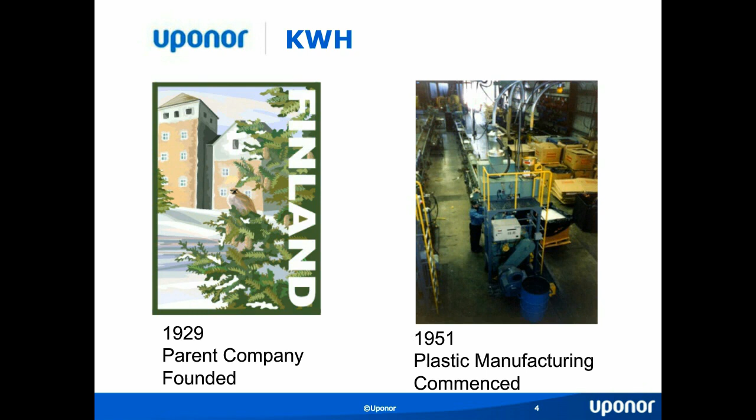After establishing itself as a major pipe manufacturer in Finland and other Scandinavian countries, KWH/Uponor purchased a facility in Huntsville, Ontario in 1968, thus beginning its venture into the North American market. Also in 1968 was the first year that KWH/Uponor began to produce Sclairpipe.

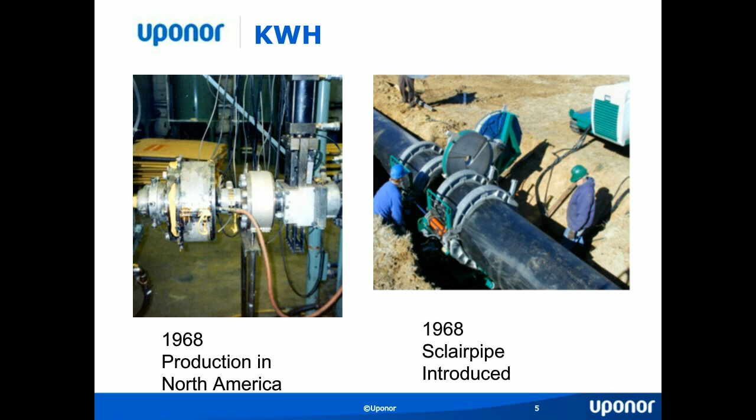Following the opening of our facility in Huntsville, Ontario, it was determined that a second plant was required to meet the demand for polyethylene pipe. That second plant was located in Saskatoon, Saskatchewan. Both plants are ISO certified, and they have fitting shops that can meet any type of application a customer brings to us.

In July of 2013, the merger between Uponor and KWH was approved, and in October 2013, KWH became exclusively known as Uponor Infra Ltd. That concludes the history portion of my presentation, and now I will turn our attention to talking exclusively about Weholite Pipe.

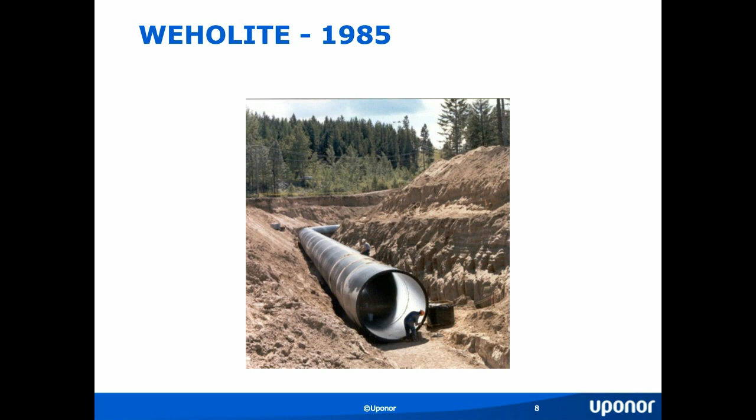Weholite Pipe has actually been around a very long time, around 33 years, and we began production of it in 1985. So what exactly is Weholite Pipe? It's a large diameter pipe ranging anywhere from 18 inches up to 11 feet on the ID.

It's made from exactly the same material as our solid wall polyethylene pipe, except rather than extruding a solid circular pipe, we're extruding a profile, say for example 3 inches high by 5 inches wide, and we take that profile and wrap it around a drum, welding the inside and outside of the profile together to construct the pipe. As you can envision, this is a helically wound pipe, made to the ASTM F894 standard.

As shown in this picture, the pipe is made by first producing a profile, as seen at the bottom, and then winding that profile around the drum. As we're winding it, we're welding both the inside and outside wall of the profile to create the helically wound pipe. As mentioned, the pipe diameters range anywhere from 18 inches up to 11 feet, and if it were shippable, we could go even larger, but we're restricted by transportation regulations.

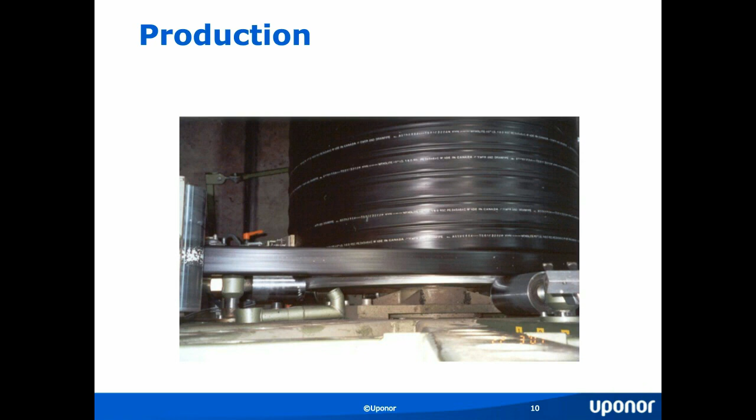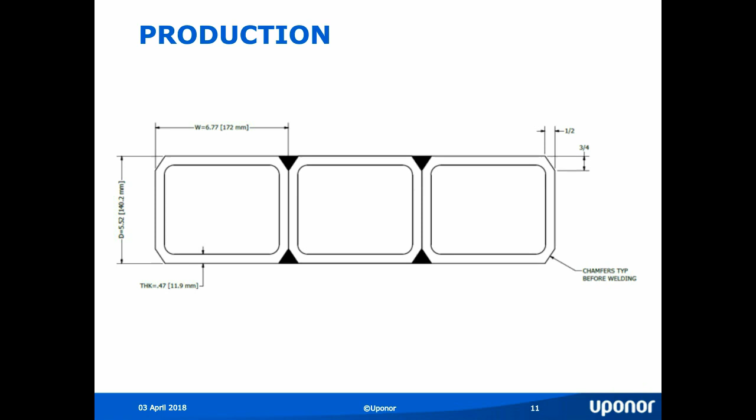On this slide, you see a sketch of how our pipe would look if you were to take a cross-section of the profiles away from the pipe and had a look at it from the end. The black triangles are our factory welds. It's by no accident that the penetration of the factory weld is deeper than that of the actual profile weld. That's what gives us the strength of the pipe, the fact that these factory welds are deeper than the width of the profile itself. That's what provides its strength.

On this picture, you can see the worker standing at the end of the pipe as the pipe is completed being manufactured. You're looking at a 10-foot diameter Weholite pipe, likely in a 45-foot length, coming off the assembly line, getting ready to be shipped out and taken to the customer.

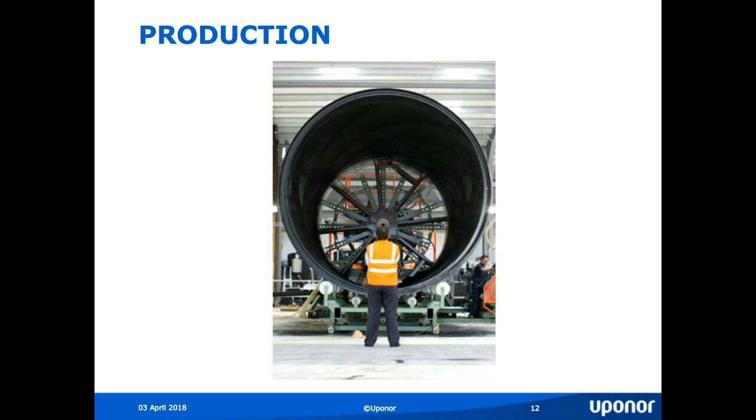All of our factories are ISO certified, both Huntsville and Saskatoon. When we produce the pipe in accordance to the ASTM F894 standard, we are required to also produce the quality control records that go with that standard. So that would be, we can provide for you product quality records and mill tests.

When we produce the pipe and or fitting, QA must sign off on that first. If we are producing fittings, then our fitting shop must sign off on the fittings. And then the last look at the pipe or fittings would be from our shipping department. As they're loading the truck, our shipping department observes the pipe itself, and if they notice anything that is not up to our high standards, then they'll flag it and bring out our QA people, and there will be some recommendation as to what needs to be done in order to make that pipe perfect.

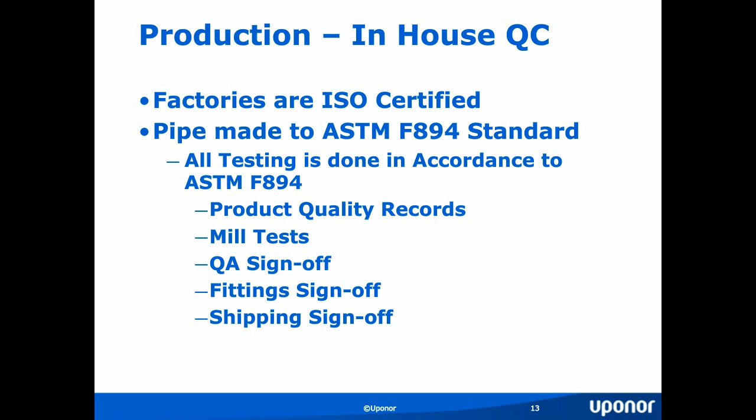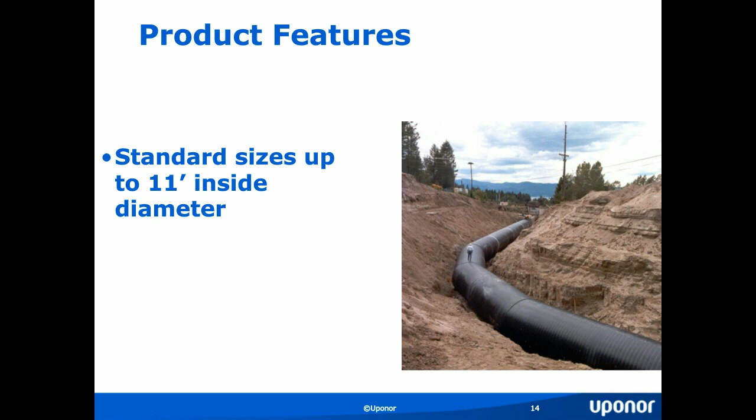All our joints, when welded, are leak-free, and that's extremely important, especially in the hydro market, whereby every drop of water counts for power production and efficiencies. Having a leak-free system allows you to have the most efficient power production possible.

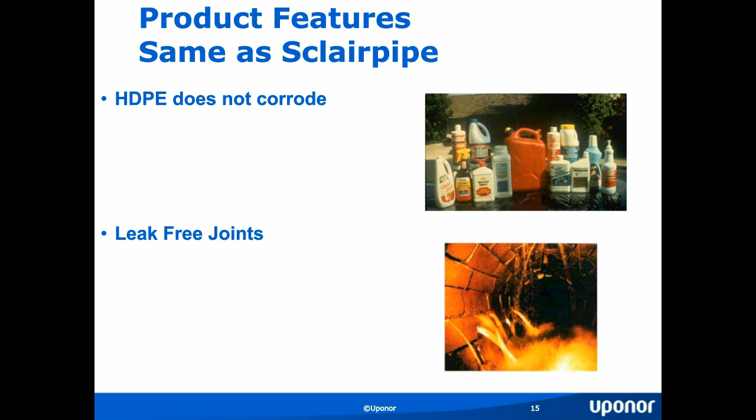That's important, like in a storm market where you've got a lot of grit coming down the pipe, and you may also experience a bit of that in a hydro facility as well. So we stand by our product very highly when it comes down to abrasion, and the operators of hydro projects in the past have not noticed any wear in our pipe, even over the last decade.

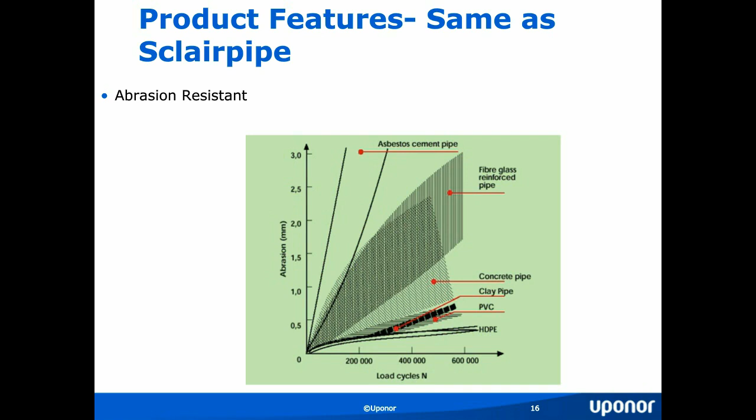The other feature of Weholite pipe is that it's a flexible pipe. It can tolerate differential settlement very well. We have a facility in the Tsawwassen area whereby they chose Weholite pipe because in that particular location they were going to experience high degrees of settlement. Also, Tsawwassen is very close to Vancouver, which is in a seismic loading area, and they also wanted a pipe that's going to stand up to seismic loadings. For that reason, that's why they chose Weholite pipe for that particular project.

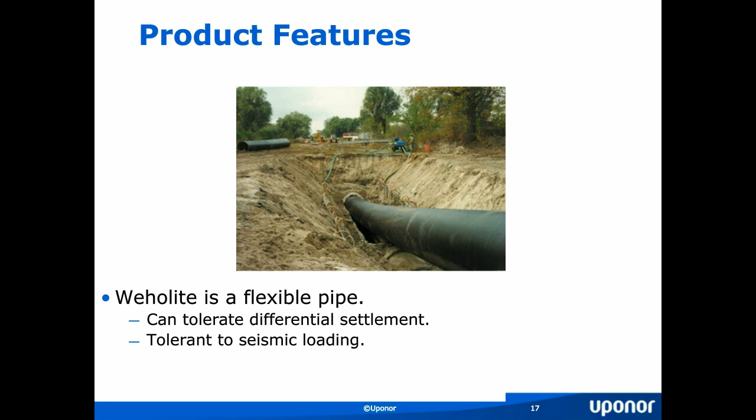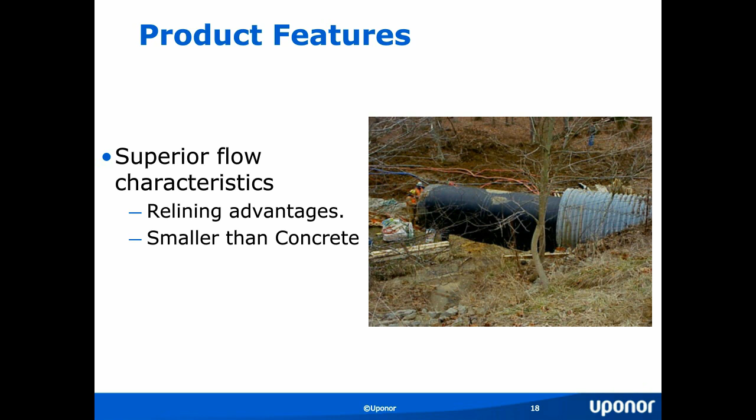Weholite weighs about one-tenth that of concrete pipe, and that has installation benefits, especially on mountainsides where many hydro projects are installed. Contractors are looking for a light material that is easy to handle in these remote locations. By weighing one-tenth that of concrete, your installation equipment requirements are greatly reduced, which has massive benefits for a job site because it's much more economical to utilize an excavator than a crane.

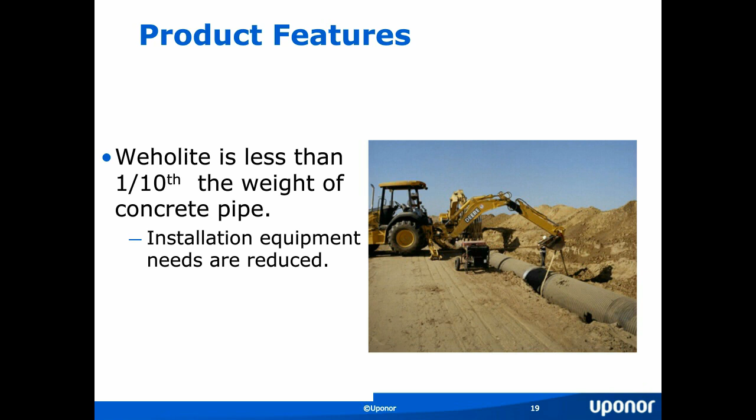The production process allows for longer lengths. We can make this material in any length required. For reline applications, where the staging area isn't that large, perhaps a 16-foot pipe length would be advisable. In other instances, room space isn't an issue, so we can ship all the way up to 102 inches in 53-foot lengths, and our 108, 120 inch diameter pipe would be shipped in 45-foot lengths. By shipping in as long a length as possible, you minimize your number of joints and your shipping costs, because you're getting more on per truck.

Weholite can also be nested. We've had several projects in the past requiring some 96-inch pipe for a hydro project, and then on an adjacent project, some 84-inch pipe. We were able to nest those two pipes together and cut the freight costs in half. You could not do that with a material that has epoxy coatings, because you'd remove those coatings when nesting the pipe together. And you couldn't do that with concrete either, because it would be way too heavy.

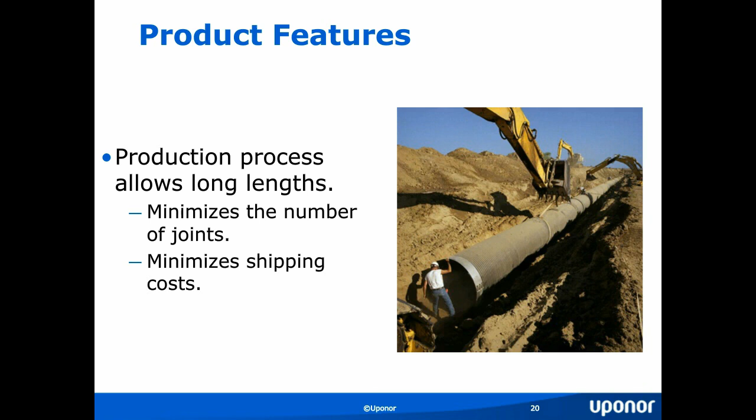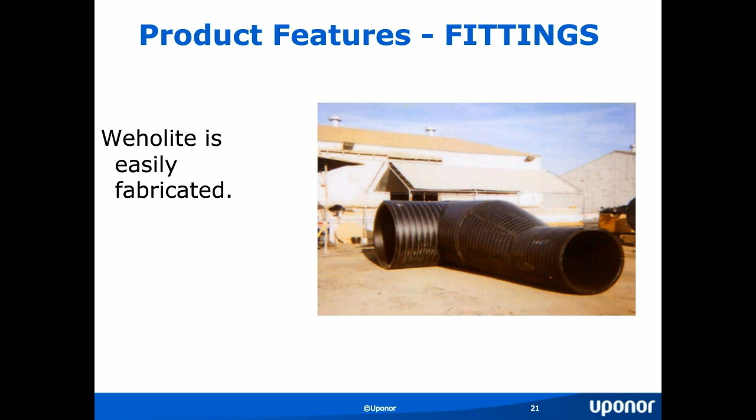In this picture, it's showing our 10-foot diameter, or 3,050 millimeter diameter, Weholite at 68 degrees. This is for a power project around the Whistler, BC area. It arrives as one piece — they're not made on site. They are made in our fitting shop, delivered to the site, where it's then welded into place.

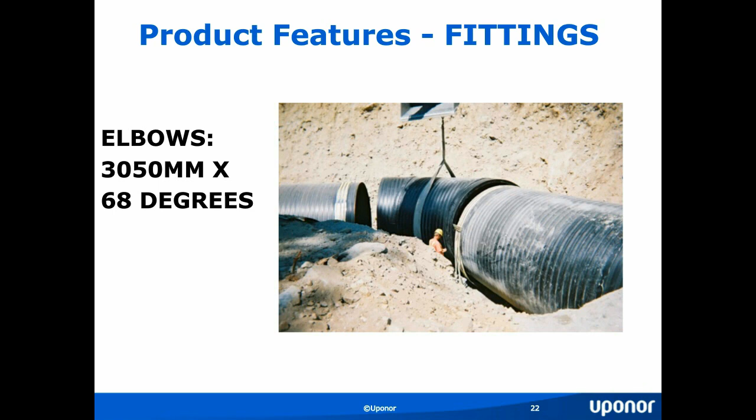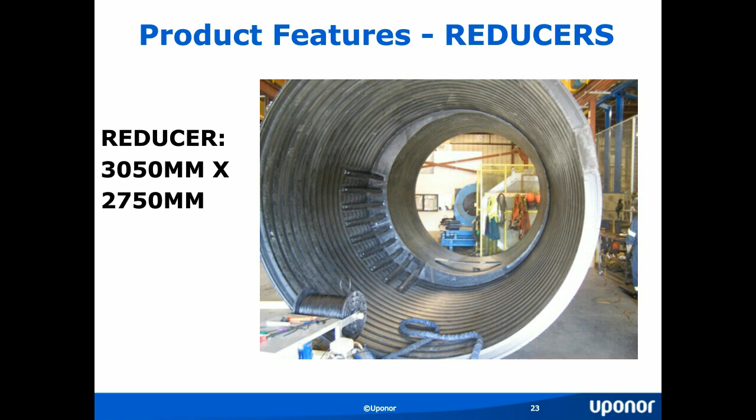In this picture, you're looking at a reducer. This particular reducer is going to a power facility on Vancouver Island, reducing from our 10-foot diameter Weholite down to our 9-foot diameter Weholite. You can see those bars on the inside — those will eventually be plated over to allow a nice, smooth transition from the 120 down to the 108. You can see where we've aligned the inverts of the 120 and the 108 inch, creating that step in the reducer. If we didn't plate that over, we'd have that step, and with your flow characteristics you can't have that, especially in a power project. So we plate it over to make it a nice, smooth transition.

On this slide, you're looking at an 1800 millimeter by 1200 millimeter lateral going into the Annacis Island wastewater treatment plant. This was an expansion to the existing plant. You can see the two 48-inch pipes in the background that we had to tie into, which were pre-existing before the expansion. We made a manifold for those 48-inch pipes to tie into, and once connected to the 72-inch, that would carry into the fan room, which eventually takes the foul air into a processing chamber. The interesting part of this job was that, being Annacis Island in Vancouver, we could not shut those trickling filters down for more than 24 hours. So everything you see there had to be welded up in advance and then lifted into place to meet this 24-hour schedule. The installation began, and within 23 hours we were able to accomplish the task.

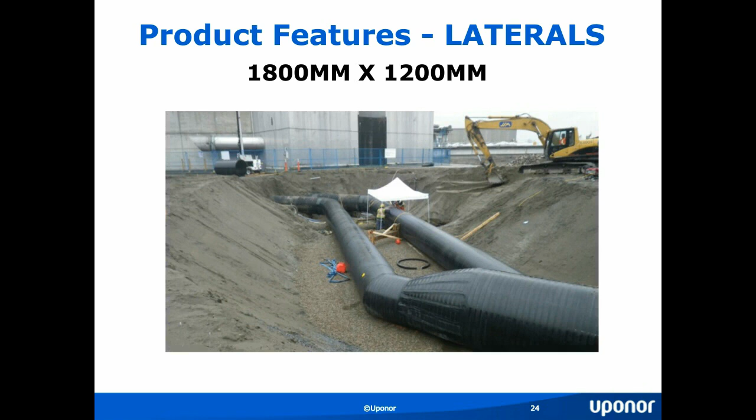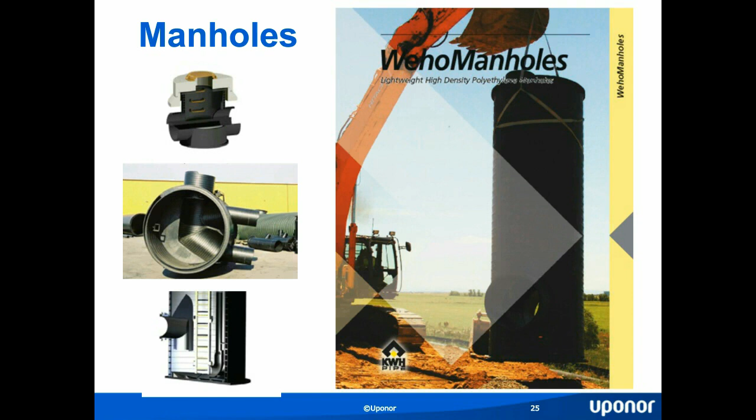Sticking with the vertical concept, Weholite can easily be made into a pump station. We can provide all the appurtenances required in order to install pumps, ladders. If these are very deep, we can provide platforms as well. Your choice as an owner to use your own pumps, or we can provide them, and same with the control system. If you have a preferred vendor for your controls, then you're more than welcome to integrate that with our manhole, or we can provide the controls as well.

The other novel item that we have on our pump stations is buoyancy control. We can design buoyancy control platforms, bases, in order to counteract all your buoyancy forces that are going to be on the lift station. And that has the advantage of the contractor not having to pour in place a base.

Some of these installations are in the cold weather, like the one with the City of Calgary a couple of years ago. It was minus 30. They wanted us to design their lift station with a buoyancy control base, and so we did that, and they were able to just offload this lift station off the truck onto this mud pad that they had built, without having to incur the cold weather conditions and having to pour concrete under those conditions. So very slick installation, made the contractor very happy.

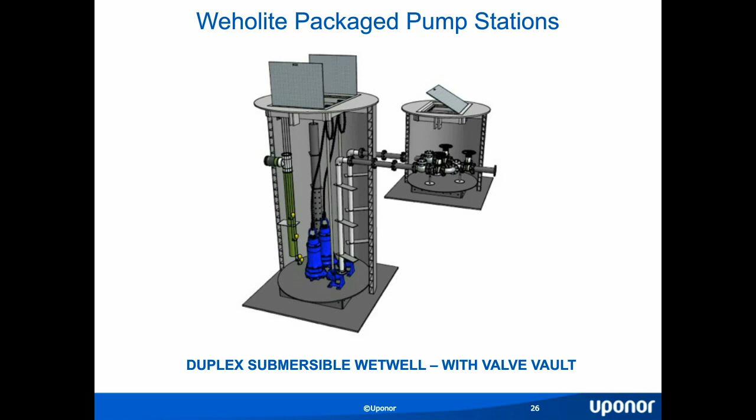We are also able to produce Weholite in the form of panel. So rather than wind the profile around a drum, we're just simply extruding the profile and creating panels with this. And the advantage to that is that we can make rectangular tanks versus circular. The big advantage to that is that if you have a small footprint where you want this tank installed, and circular is just not going to give you the capacity you need, or the capacity of a circular is not going to take up the space you have available, then we can definitely use a panel concept to accommodate your footprint.

Weholite is also installed to a particular standard. That would be the ASTM D2321. So we're very particular about bedding and backfill. And if you as consultants or contractors are experienced with installing PVC, then it's the same specification for Weholite in terms of the ASTM installation standard.

Weholite can be buried to 2 feet to 50 feet depth of cover. It is a structural pipe and can withstand H25 highway loadings. We can even do E80 loadings.

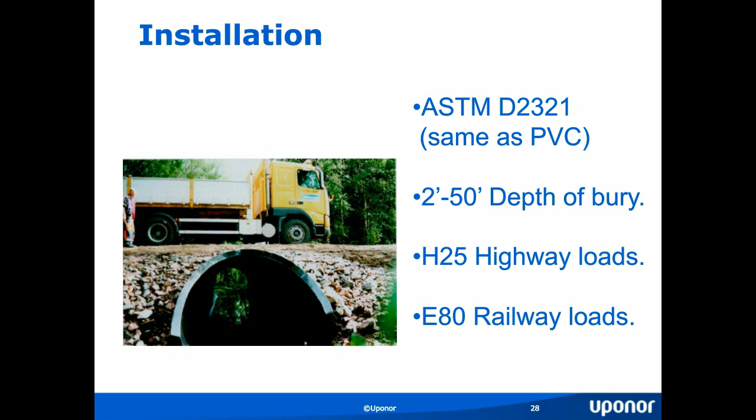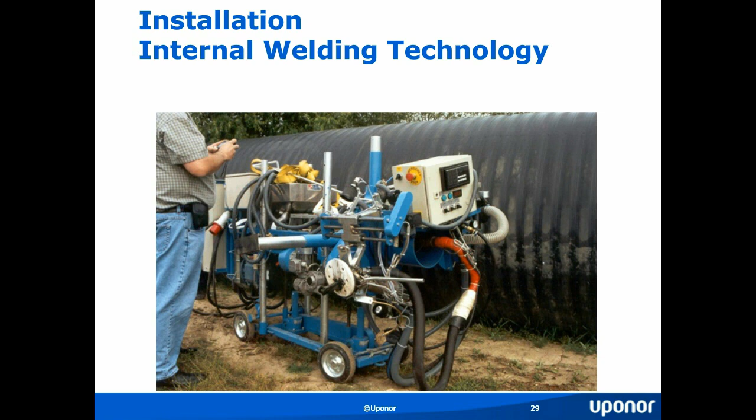The internal welder sits inside the pipe, so there's nothing outside the pipe that you're using for welding. This has particular advantages if you're along a roadway and there's a fair amount of traffic going by you, then welding inside the pipe certainly has its advantages.

After the weld is complete, the band is removed and onto the next joint. And this is a pressure joint for our hydro projects and or the irrigation market as well. And so this joint is very, very strong.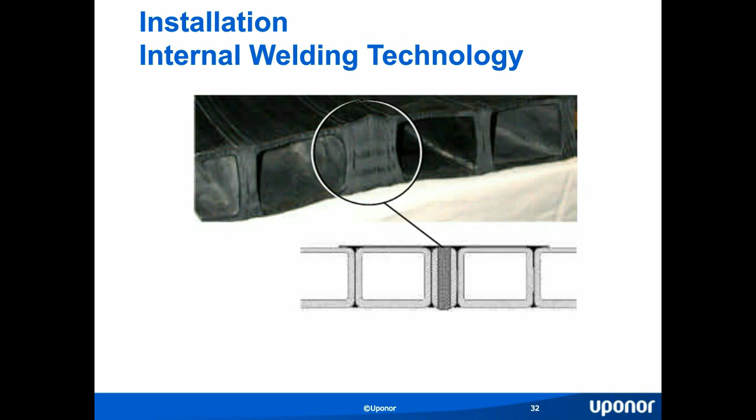In addition to our internal welder, we can weld this pipe using our handheld extrusion welding technology. This is the technology that we used before we had the internal welder, and it's also technology used on lower pressure applications.

We just finished a project in Oregon whereby the welding was being conducted on a pressure pipe running at 7.5 psi, and we were able to accomplish that with just our ID welds, as you're seeing here. Did not need the use of the extrusion welder. The advantage, if you can use the extrusion welding technology, is that there are thousands of these guns available throughout North America, whereas the availability of the internal welder is quite limited to the amount of machines that we have.

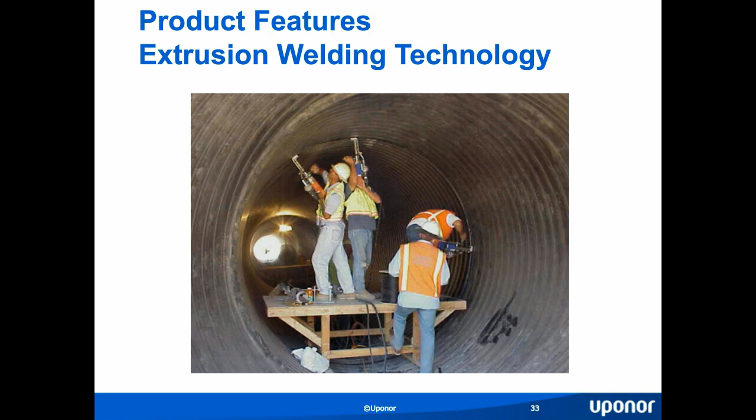As I mentioned before, a welded joint is extremely beneficial in areas of soft ground conditions, areas with high settlement, as in the Tsawwassen project, and in areas of seismic activity. So that's pretty much all the way down the west coast of North America.

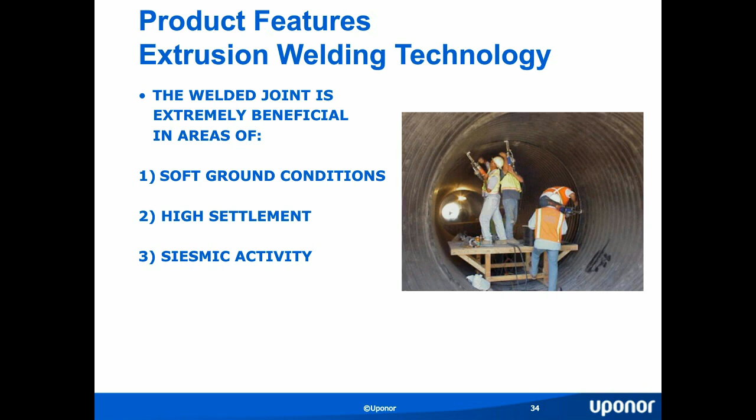If you are designing a Weholite piping system for your power project and want to get specific on the welding of the pipe, then we have these specifications that you may use in order to specify the type of weld you would like to see on your project. That's pressure dependent. So up to 7.5 psi would be your just ID weld, and beyond that, we can use the internal welder for an ID and OD weld.

But for most projects, they don't get that specific. So just by stipulating the pressure and extrusion welding, that would be enough for a manufacturer to base their welding estimate on, and for the contractor to understand what type of weld is required.

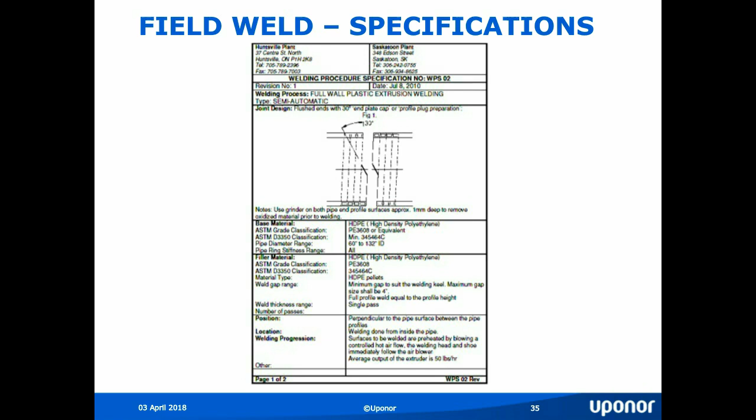We also have, in addition to our welded joint, a threaded connection. The thread is connected in our factory by removing the outside profile wall of one end of the pipe and the inside profile wall of the adjoining pipe. That's the advantage of a helically wound pipe, is that you can create these threads.

The threads joint is not leak-free, but it is silt-tight. It's an excellent application for culverts because they don't need to be leak-free in 99% of the cases. And because it can be performed by a contractor without having a Uponor technician there to weld it, it's very contractor friendly as well.

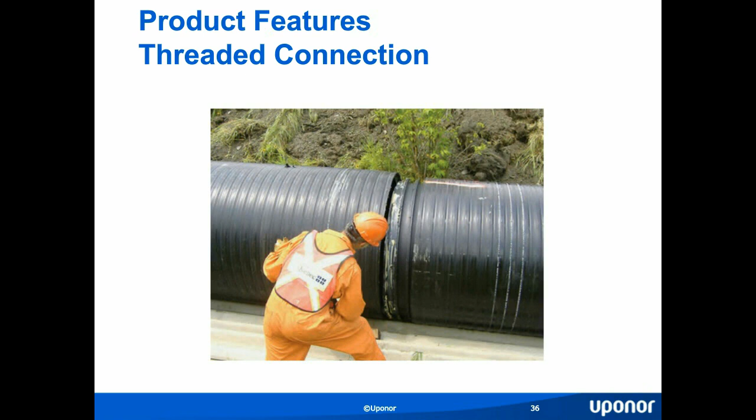We also can offer a band coupling. This particular band coupling is not only pressure rated, but it is leak free. The advantage to the coupling is that if you are in a trench where there's considerable water and you can't dispose of the water, say you're on a side street doing a sanitary sewer project and you just have no place to put any groundwater that you're coming across due to environmental regulations and such, they can use this band.

The reason why you would want to use the band is because you can't weld in wet conditions. So this is why we offer this band. It is quick, it's reliable, contractor friendly, and it gets the job done as well as the welded joint.

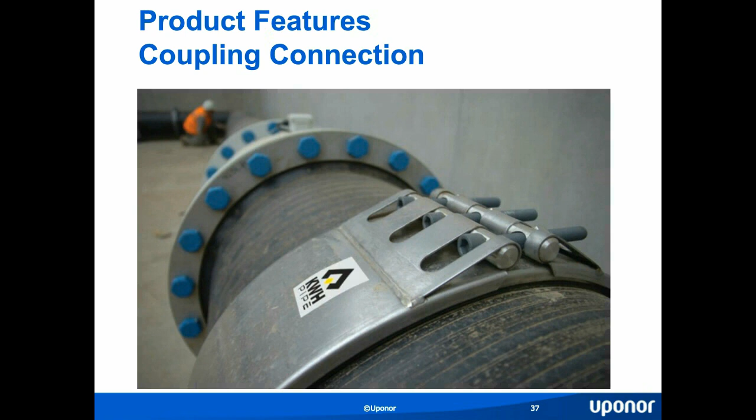We also offer a flange connection. Flange connections are often used going into concrete structures or into a joining pipe. The reason why you'd want to use it on a joining pipe is that, especially on a power project, you're going to pressure out at roughly 22.5 psi on our Weholite, and most power projects require pressure much, much beyond that. So why even have that type of connection?

Why use Weholite? Why not all steel? Contractors love the material. It's easy to use, it's light, comes in long lengths, joints are reduced, and you can nest this pipe with a smaller size and not worry about the coatings on it. So it's very economical, not only to install, but also to maintain.

I've done several walkthroughs on power projects that have been installed for 10 years, and there's absolutely no detriment to the Weholite pipe at all, whereas on steel you have to be very careful during your inspections to make sure the coatings and everything are intact, and if they require repairs, then there's going to be a cost associated with that. Weholite, you simply do not have that.

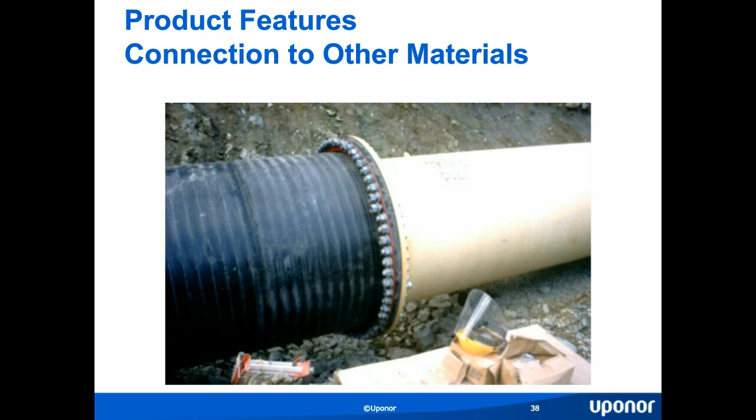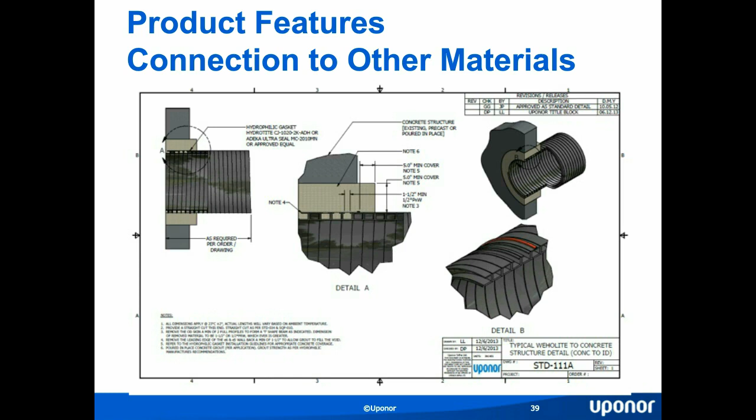In many instances, we are required to connect to PVC. And in doing so, we can use what is called an Inserta Tee. An Inserta Tee is exactly what you see there, and our technician would cut a hole into the Weholite, and it allows you to plop this Inserta Tee into the pipe. The contractor is free to do that themselves because Weholite is quite easy to work with.

The limitations are that it's only available up to 900 millimeter, and many lateral connections are much larger than that. So if you have an existing PVC pipe or concrete that goes beyond 900 millimeter, then we would concrete encase that, very similar to what we did with concrete. We have sketches and details on how that connection can be made. For our irrigation projects, we are asked to supply sometimes 8, 10, 12-inch, 18-inch diameter lateral connections, and with those we provide a flange connection to allow you to tie in downstream to your existing pipe.

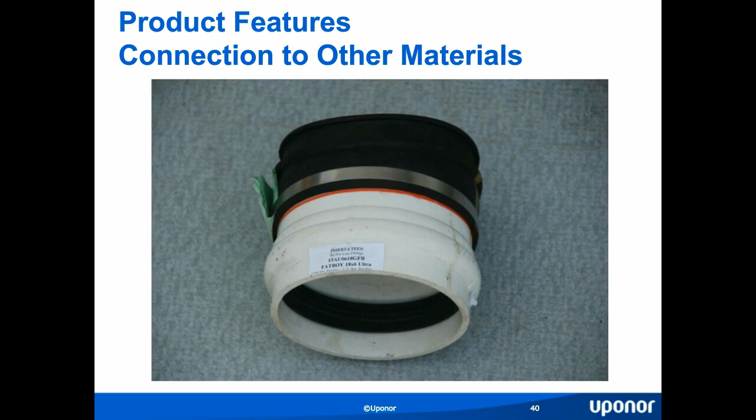As you will see from the other sketches I've provided in the past, Weholite is a dual wall pipe. So it's very likely in the event that a forklift should hit it, or a shovel or something penetrates the outside wall, there's a very good chance the inside wall will still be intact. Under a seismic event, you may have a rock that shakes up against the outside of the pipe and creates some damage, but it's very unlikely it would go through to the other side. So there's a certain amount of advantages to using a dual wall pipe for sure.

We can fill the annular space with grout, and the advantages are there. We can go very, very deep with Weholite, and I've seen some landfill manholes that are 60 feet deep, where the last 30 feet was filled with grout in order to give it the stiffness we needed with those soil loads back onto it. And if there's anything that would happen to the pipe along the way, or just through wear and tear over the years, we have local sources available that we can come out and make any type of repairs with.

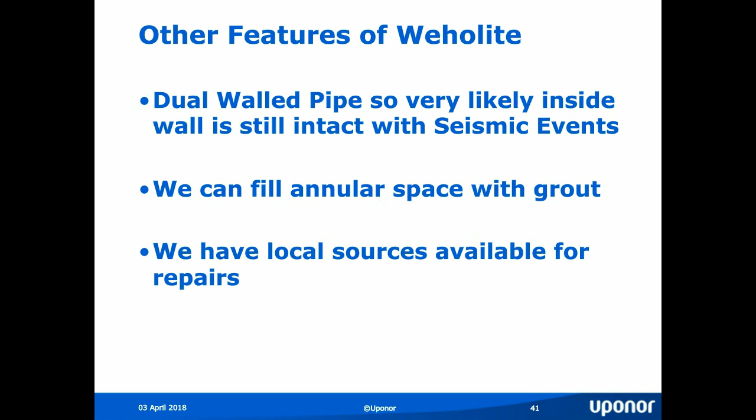It's becoming more and more common for consultants to specify some particular type of joint testing. On many occasions, we do just state a visual inspection because our techs are very well trained in noticing a joint that may not be correct. They will notice the color of the resin may be off a bit, maybe looking a pale white color, or perhaps even a bit bubbly, which would be from moisture within the resin. If they see that, they stop welding, find the problem, then grind or rout out the old joint and re-weld it. That's what happens with our visual inspection; we notice things like this that we can take corrective action on.

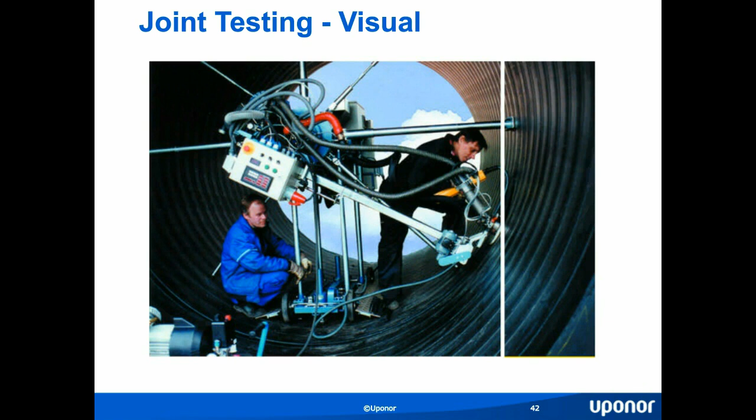Another joint test is to simply remove a coupon. As you can see here, we take a sample from this weld - this is our internal weld that we've made in the past. We take a coupon out, generally speaking 2 inches wide and 12 inches long, and overnight it to our lab to do a tensile test on it. It will break, but it can't break at 15 MPa or less, or it's not considered successful. And it can't break at the weld, because we state that the joint is stronger than the pipe itself, since there's more material in the weld than there is in the actual factory welds. So we can't have a break at our field weld - if there is, then obviously we have to take some corrective action.

So we generally test every 5% of the joints. There's this project that we just concluded a little while ago, and we were asked to take three coupons - one at the beginning of the project, one at the middle, and one at the end. They all passed with flying colors. Like I said, our minimum tensile pull on that would be 15 MPa, so we like to see it close to 20 or 25 MPa.

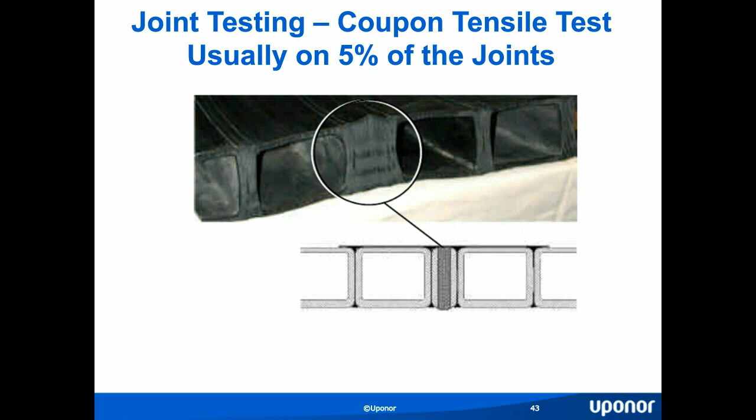Another test that we can do, and this is becoming more and more popular, is an air test. You really can't see it from this photo, but I'll describe it to you. It's 2 bladders, and in the middle, there is a gap. The 2 bladders fill up with air on both sides of the joint, and that's creating your seal.

This other gap, this third gap, is just at the joint itself, and that's where we actually inject the air at a certain pressure. It's 8 psi for 3.5 minutes, and we can't see the pressure drop for more than half a psi in that time frame.

Most of our joints, or all our joints anyways, being welded, we have no loss in air pressure during this test. The machines run for roughly $25,000, and there are 2 manufacturers, Lansas and Plug-It, and both those are very good companies that we like to utilize. I believe both of them are out of California.

That's becoming more and more frequent, and with this joint test, you can do it on every joint, not just like 5% with a coupon test. So quite a detailed test.

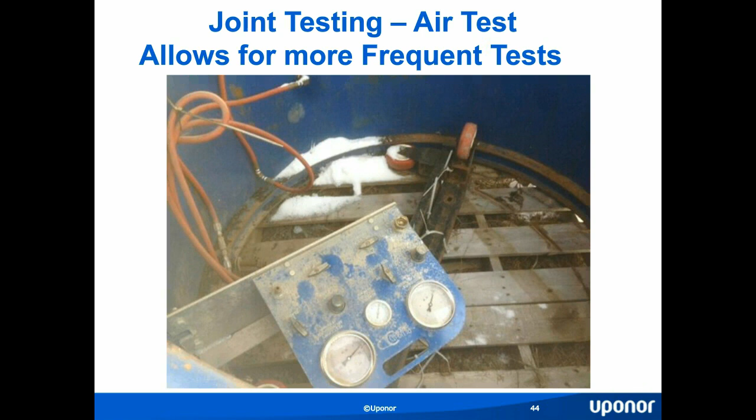Uponor also provides full installation support. Our technicians are all factory certified, and when they're not in the field, they're in our shops, welding up Weholite and gaining experience that way. They're great problem solvers in the field. They're Uponor employees, not a subcontractor in any way. And we can also provide an on-site engineer, thus ensuring the proper installation from beginning to end is maintained.

I would then like to turn our attention to Weholite hydro projects. I'm just going to focus on hydro projects, but you do realize that we can reline culverts, we can produce tanks, we can do storm and sanitary sewer projects. We also do irrigation projects. We offer lift stations. But for this end of it, since it's a hydro webinar, we're going to just focus on hydro projects.

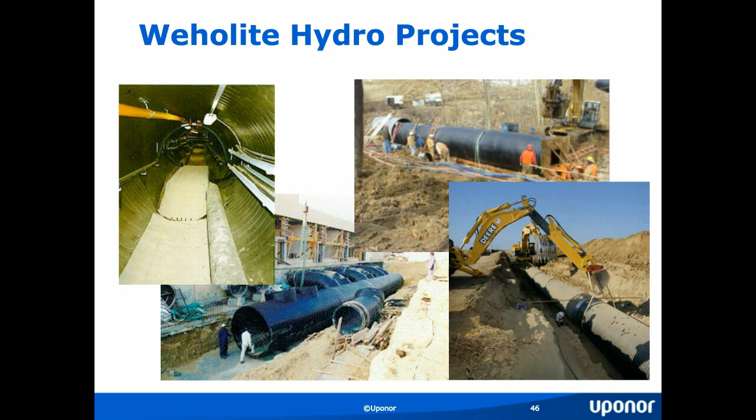So I'm going to present these hydro projects in chronological order. Beginning with PacifiCorp in year 2000, we did a hydroelectric water supply project in Bigfork, Montana. This is large diameter, I believe it was 10 feet diameter, operating up to 8 psi. They wanted something with a tight, reliable joint because it was a hydro project. Every drop counts. They also wanted something with excellent flow characteristics, and the longer lengths reduced the time on site substantially and reduced the shipping costs as well.

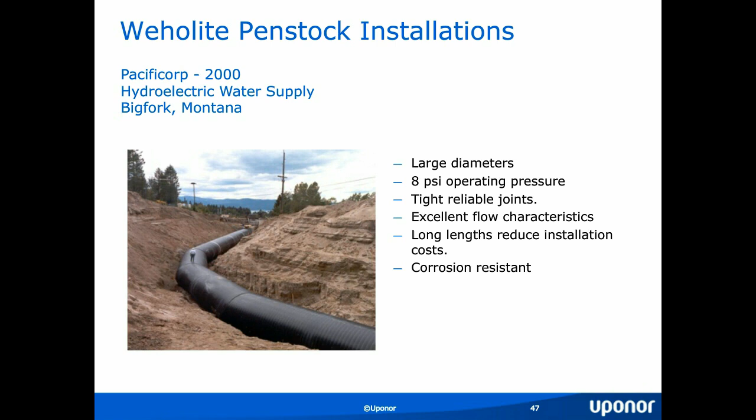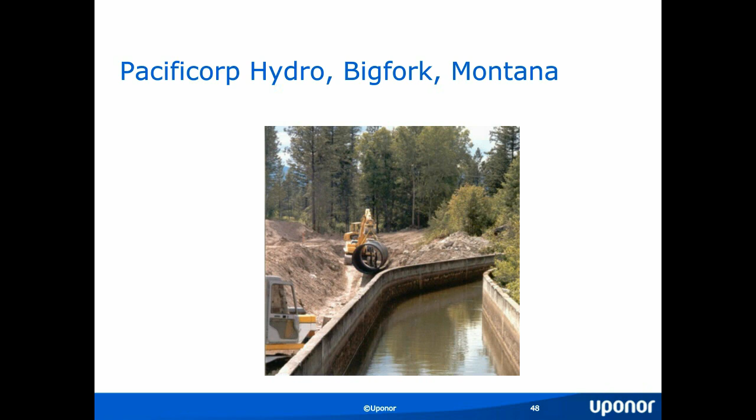You can see the front end of the pipe just as it's being welded together and under construction for the PacifiCorp job. This particular pipe was 120 inch with a ring stiffness coefficient of 250. The ring stiffness coefficient is the particular stiffness of the pipe, and it's that parameter that you enter into our web calculator to determine the loadings on the pipe. It also, the ring stiffness, tells you what sort of pressure that this particular pipe will withstand. Being at 8 psi, we had to do both an ID and OD weld on this pipe, as the internal welder that we normally would have used was not built or designed yet.

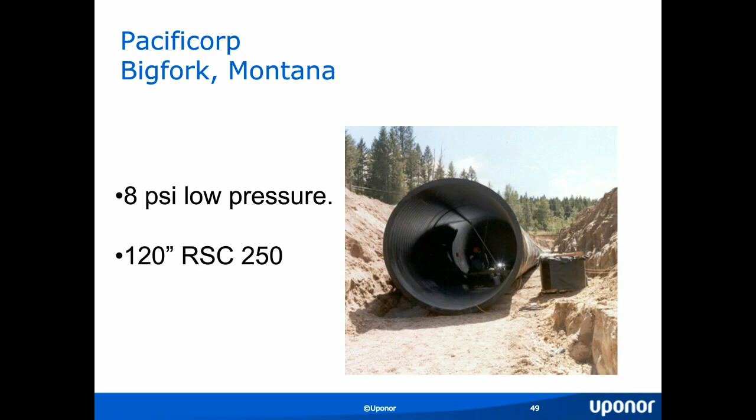The next project is the Rutherford Creek Cloud Works project, built in 2003. Low pressure, 15 psi before tying into the steel penstock with a flange. This project is located up near Whistler, BC, and it was roughly 5,000 feet of Weholite pipe before being flanged into roughly 8,000 feet of steel pipe. We did a walkthrough on this pipe a few years back, and there is no detrimental effects occurring on this pipe due to any sand or abrasion, no corrosion issues whatsoever. They're very happy with the way it's performing, and its maintenance cost is so low. This particular power project is producing 50 megawatts, and this Weholite pipe is a good reason why.

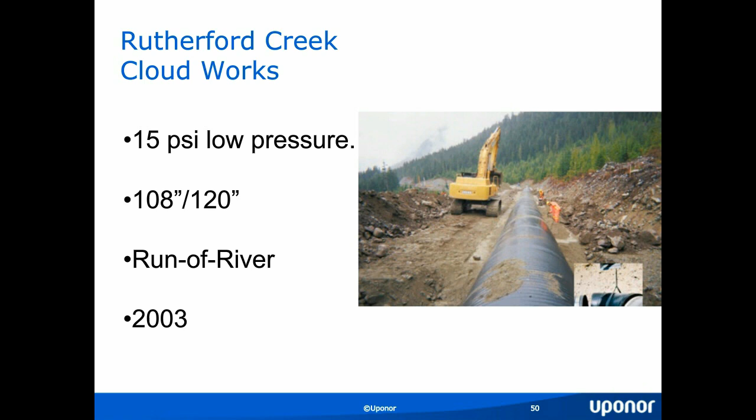The next project is Fire Creek, where the owner is Innergex, and 84-inch Weholite was the pipe being called out for. This particular project was built in 2008. Fire Creek is located in British Columbia, up near the Harrison Lakes area. It was quite a remote site. You had to drive to Pemberton and then take a 2.5-hour logging road journey to the actual site, so it was a camp job.

Remote location, and there was no problem getting the pipe there whatsoever. Even in these remote locations, we can barge it, railway it, or use trucks if trucks are available.

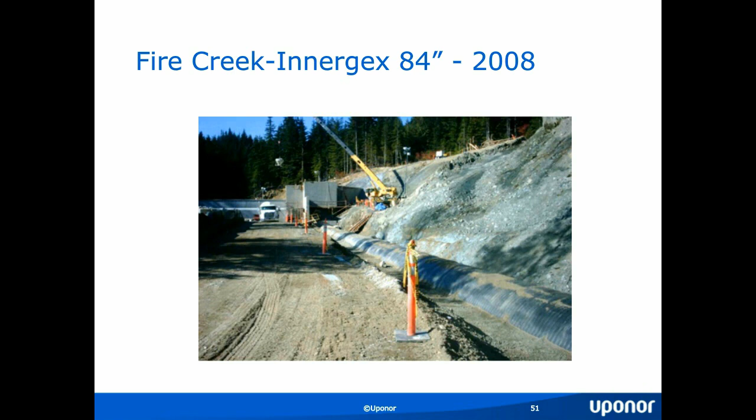The next project I'd like to talk about is the Douglas Creek project. This is also an Innergex project using 96-inch diameter Weholite, constructed in 2008. If you recall from the last slide, the Fire Creek project had 84-inch diameter Weholite. Since both projects were installed in roughly the same area, we were able to nest the 84-inch pipe inside the 96-inch, saving a lot of money on transportation.

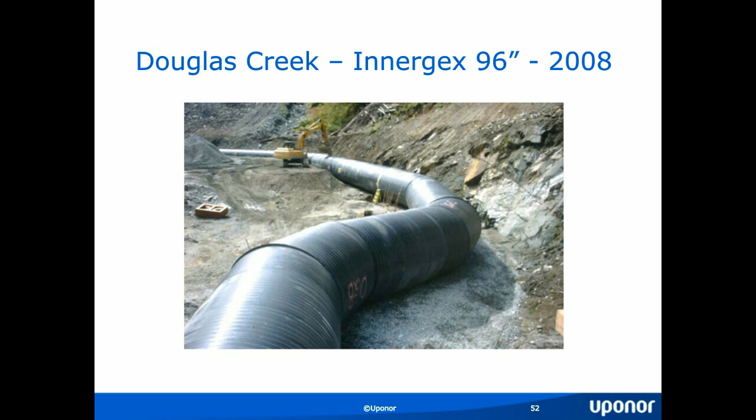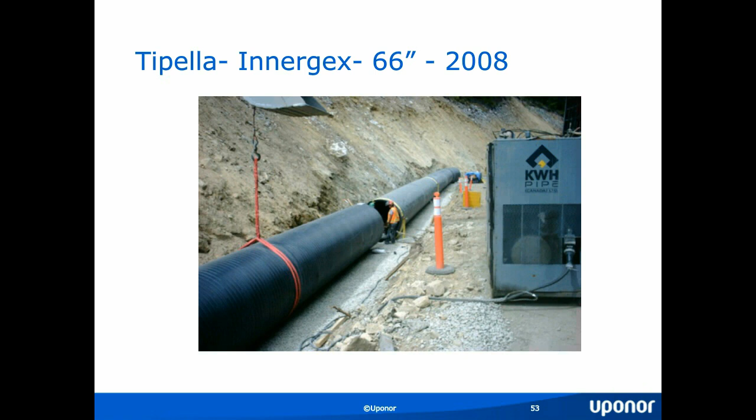The third project in the cluster of three is Tipella, also with Innergex. All three - Douglas, Fire Creek, and Tipella - are located in the Harrison Lake area. This project required the use of 66-inch Weholite, running for roughly 3,000 feet. You can see on the Tipella project, as with any hydro project, the flange connection. Running at roughly 15 psi, we pressured out with the Weholite and then going into steel thereafter.

The advantages of this - why not just use steel? Well, the economics of Weholite are so inherent. It's a light material, and all these power projects are built on mountainsides, so you want something easy to handle. The longer lengths make up fewer joints. There are no corrosive coatings to worry about, and it's very easy to maintain.

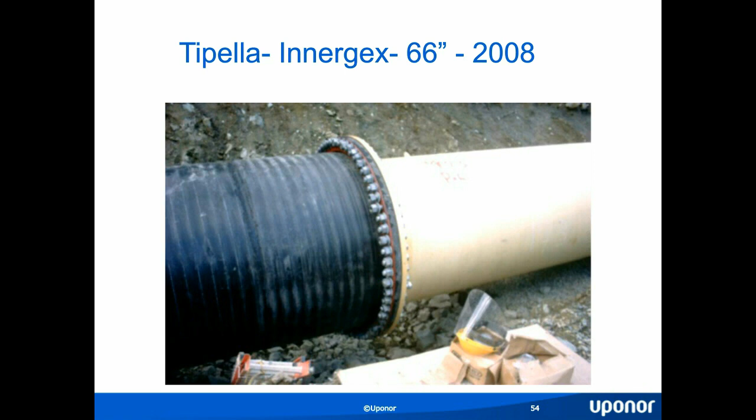Our next project requiring Weholite for Penstock was the East Toba project. East Toba is located about 50 kilometers north of Vancouver, BC. This was a very remote project requiring access only by float plane or by regular boat or barge in the case of when material had to be shipped to the site. It had a camp with roughly 350 people at its peak, and the project was built in 2010, requiring about 3,500 feet of 120-inch Weholite, running at around 15 psi.

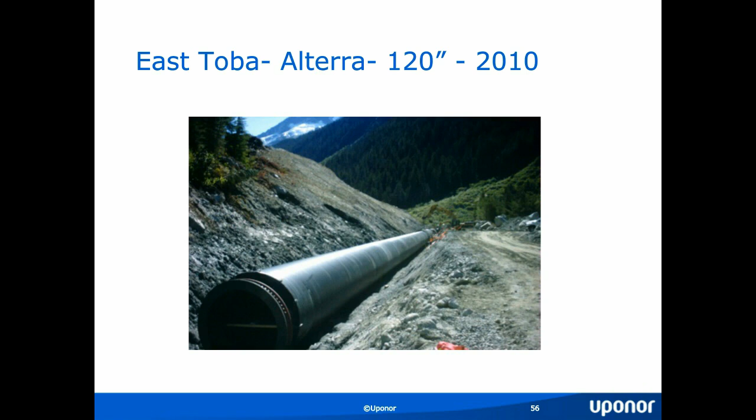Our next Weholite project is the MONTROSE Power Project, also owned by ALTERRA and also located 50 kilometers north of Vancouver, BC, sitting adjacent to the East Toba project we just talked about. On this particular project, there wasn't any Penstock requirement for Weholite, but they did use our 132-inch RC 250 Weholite in order to serve as a structure, so they did not have to pour concrete in this particular facility. There was an instance where this project was under avalanche conditions at one time of year, and all our techs had to go through specialized training on this particular project where avalanche conditions were very high.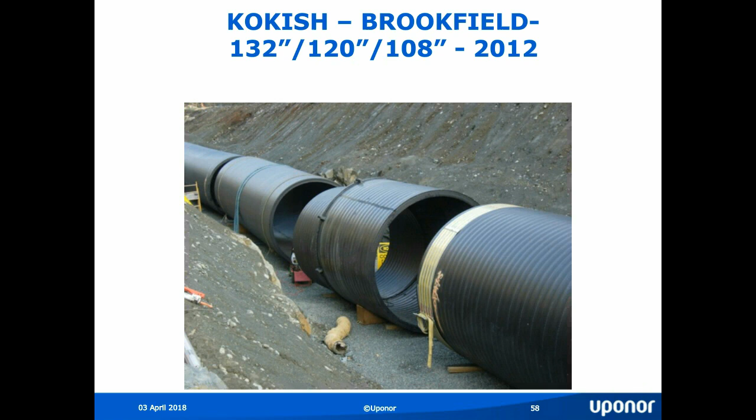That concludes the presentation of the Weholite case studies on power projects. However, you'll recall we have a handful of different applications for this material. One would be for roads and culverts, which you've seen from my presentation. As you're going up to your powerhouse or using road networks within your power facility, you may find your culverts are deteriorating and think about digging them out and replacing them. Just remember that Weholite can also be used as culverts on your roads. We also have stormwater retention and detention systems, which you may need at your power facility. So please keep all that in mind.

I'd like to turn our attention now to our website and web calculator. Our website can be found at uponor.ca, and there's a host of different things you can look for there. It has a search engine for technical information and case studies. You can go through all the other applications I've talked about in detail, with brochures included. Have a look at that, and if you have any questions, please get back to me. I'll give you all my contact information at the end of this presentation.

Next, I'd like to talk about the web calculator. It's a very useful tool for consultants, contractors, and anyone designing a power project. You access it on our website, uponor.ca, and towards the middle of the page you'll see this icon called Calculation Tool. Click on that and it'll lead you to the next page.